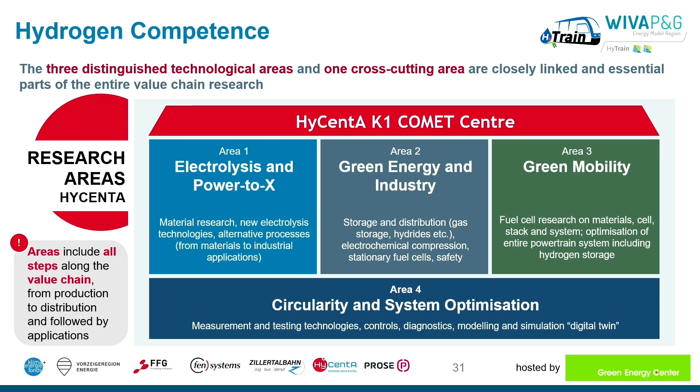So, as I mentioned, my presentation is about a comparison of different propulsion systems in the railway. This was especially necessary because the former decision on the hydrogen trains faced major headwind again last year. So we carried out a huge comparison of different technologies.

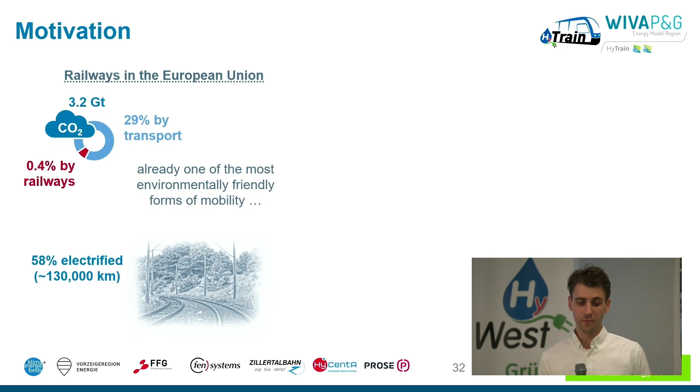And compared these. So why we need to decarbonize is all clear to us, so I don't spend much time on that. Even when the rail sector takes only a small percentage of the carbon emissions, only 58% of the European rail network is electrified. And in light of becoming climate neutral by 2050, these emissions need to be cut down to zero.

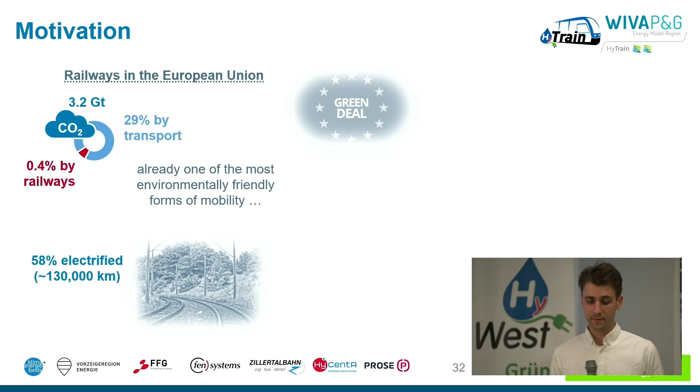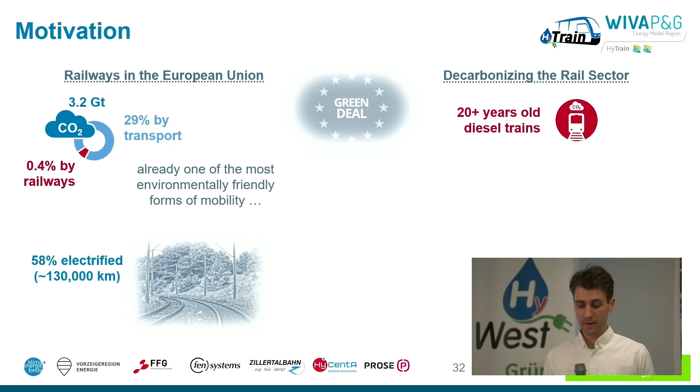So the challenge, especially for regional railway, is that electrification via catenary lines is cost intensive and resource intensive, so it's not always the case to use. This is especially the case for regional railways, because sometimes the driving frequencies or the passenger volumes aren't right for using a classic electric train. So here we are. We have some other technologies like the battery train or the hydrogen train, which are suitable alternatives.

But we need a case-by-case decision on which propulsion systems need to be used, because it always depends on the boundary conditions, which is the best or the optimum technology.

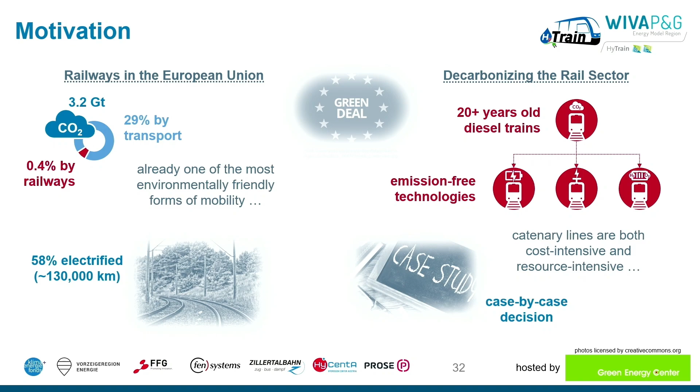So our goal was to build a methodological toolchain for scientific, technology neutral and holistic comparison of drivetrains, and the methodology is based on the following.

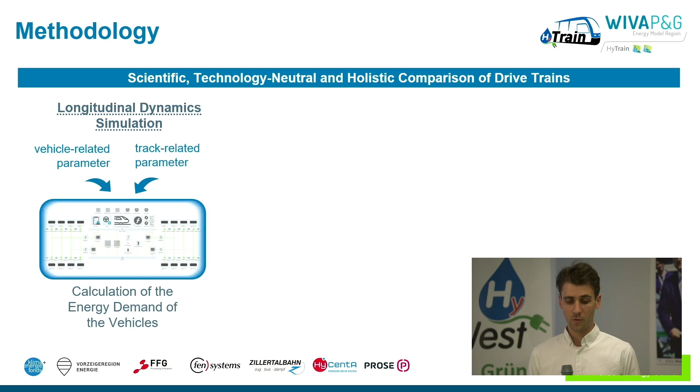First, we performed a longitudinal dynamic simulation for all the different propulsion systems to calculate the energy demand based on certain vehicle-related parameters and certain track-related parameters. Second, we collected a large amount of profound data from literature, manufacturers, and experts to quantify, for example, resources, costs, emissions, etc.

And for the typical operating period of 30 years for trains, we considered the single life cycle phases of both the vehicles and the infrastructure that is needed to supply the trains with the energy required.

And the last one is the multiple criteria decision analysis, which is needed to compare these technologies based on the quantifications from step 2 with regard to several aspects. In this case, it was an ecological aspect, an economic aspect, and also technical and operational aspect.

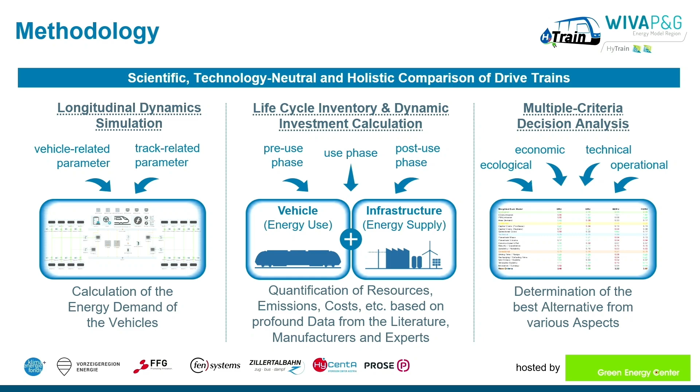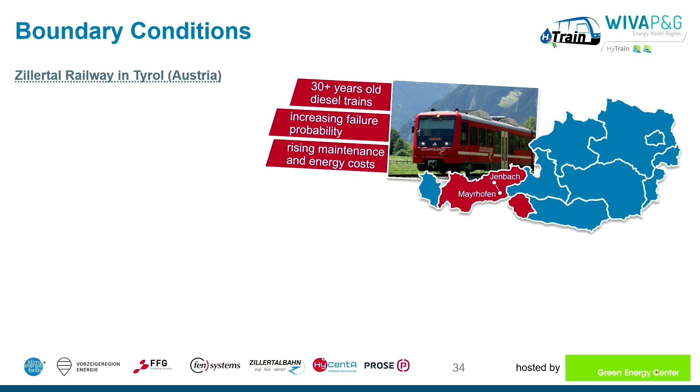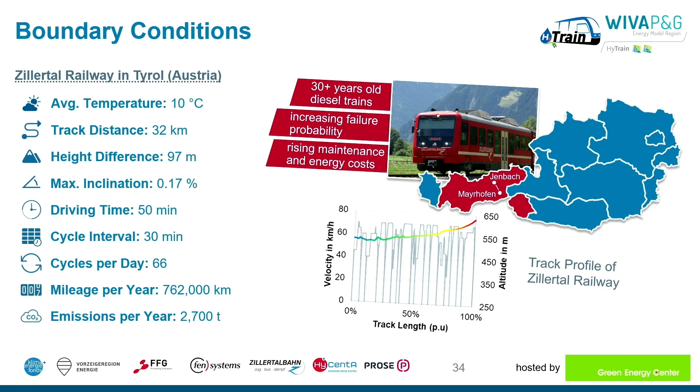So, as we all know, and I said it before, it's dependent on the boundary conditions. So we need further information about, here in this example, the Zillertalbahn. And I summarized all the track and vehicle parameters on this slide we used for our analysis.

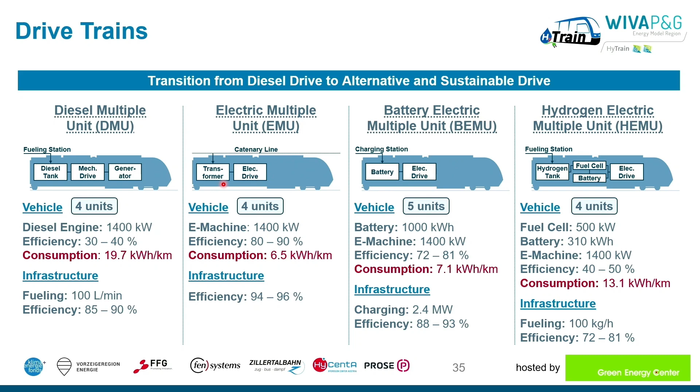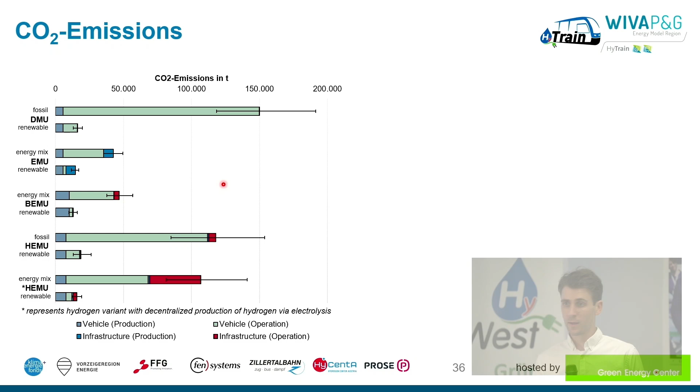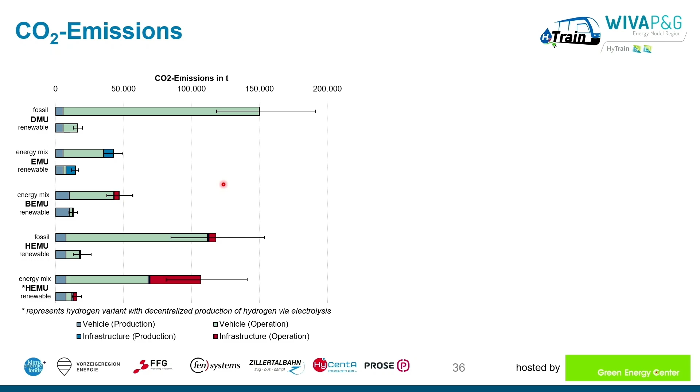With all this data we collected, we can show some results, for example on CO2 emissions. As you can see, we examined not only different technologies but also different energy sources, such as fossil diesel and renewable diesel or e-fuel, electricity from the energy mix and from renewables, and hydrogen, where we considered fossil and renewable hydrogen produced centrally and distributed to the application. On top of that, we included hydrogen produced in a decentralized way via electrolysis, also considering the energy mix or renewables as the energy source.

You can see the results here. The basic result is the bar, and both ends of the whisker indicate the upper and lower limits we found in literature describing the technologies. The results include direct as well as indirect emissions from resource use and energy use over the complete lifetime. What can we observe? The operation is the main source of emissions when we use fossil fuels or the energy mix, but when we use renewables, the production should not be ignored in terms of emissions. So as a takeaway, in the medium to long term only the use of renewables is suitable and sensible for rail operation.

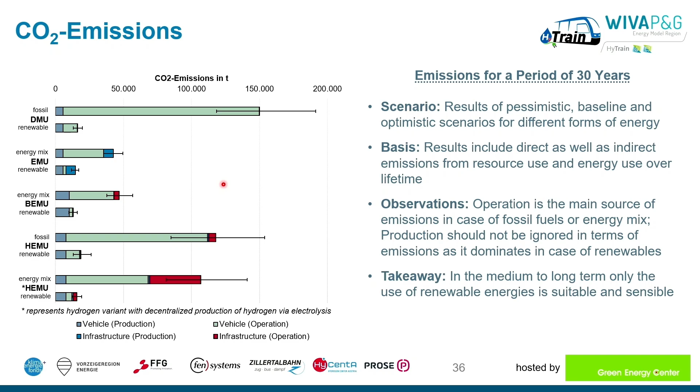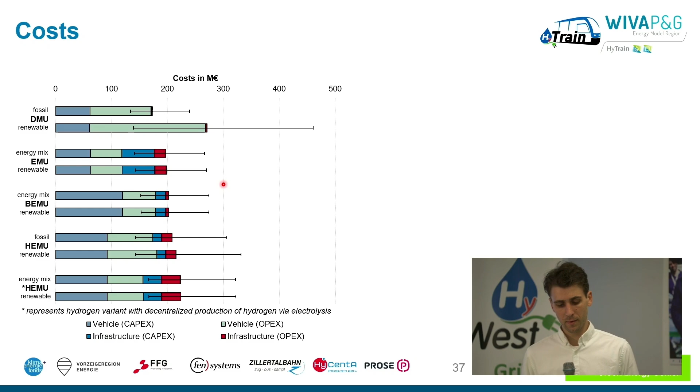A similar illustration is given here with regard to costs, but I will skip that partly because I will focus on the final comparison, which I will show you on the next slide.

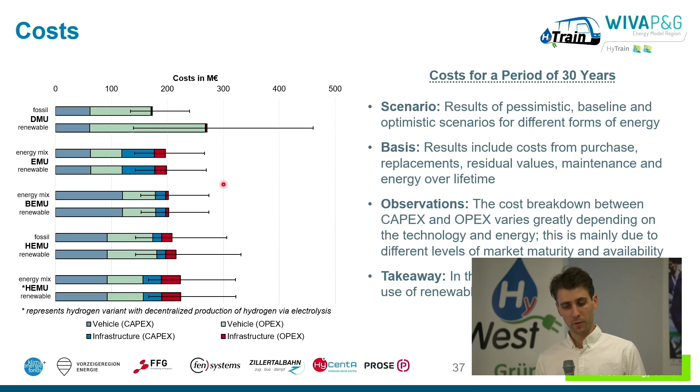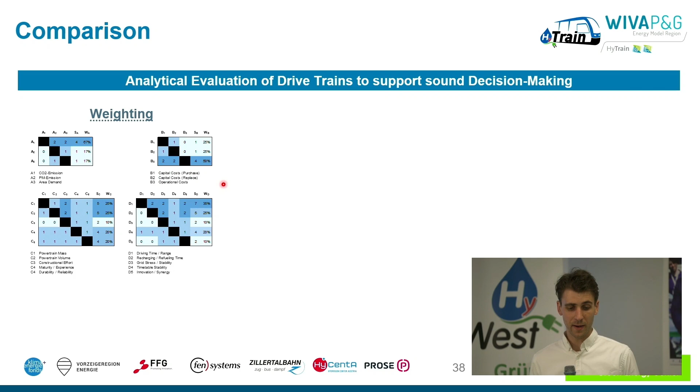We want to analytically evaluate the drivetrains with a multiple criteria analysis, and for this we used a priority matrix to give a weighting of the different aspects used in our comparison. For example, for the ecological aspect, we focused not only on CO2 emissions but also on particulate emissions or the area demand. For the economic aspect, it's the operational costs and capital costs. For the technical aspect, it is, for example, the powertrain mass, powertrain volume, constructional effort, technological maturity, and durability of the components.

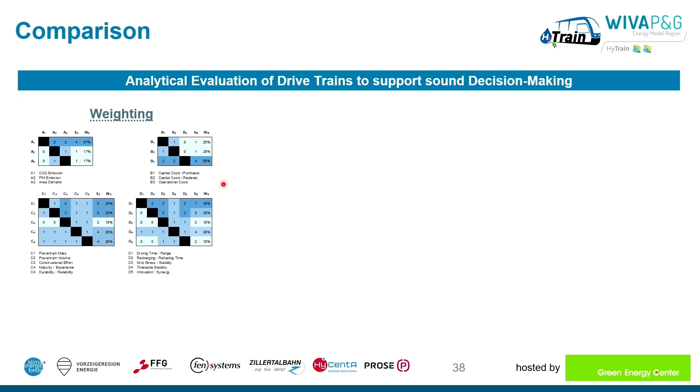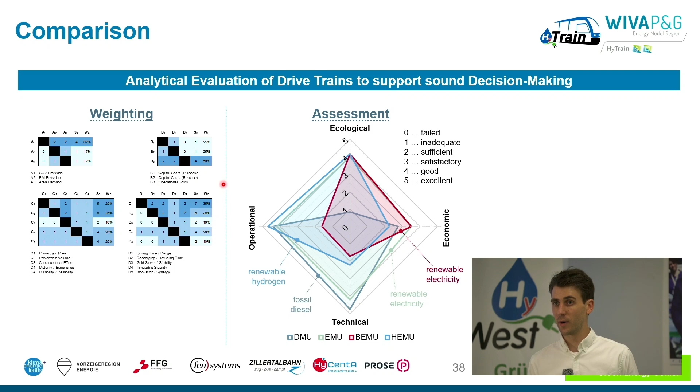Last but not least, for the operational aspect we considered, for example, the maximum driving range the technology is able to achieve, and the recharging and refueling time. By this we got a diagram that shows the four aspects in each corner. Here we focused on diesel from fossil diesel, the electric and battery train using renewable electricity, and the hydrogen train using renewable hydrogen produced via electrolysis on site.

As you can see, the hydrogen train has its benefits, especially in the ecological and in the operational aspect, but has its disadvantages in the economic aspect, for example.

Now for a really final comparison, we need to compare the ecological, economic, technical, and operational aspects. So we use another priority matrix to do so, and this is one example of the result we can get. You can see here the electric train is the best in this case, followed by the hydrogen train, and followed by the battery electric train.

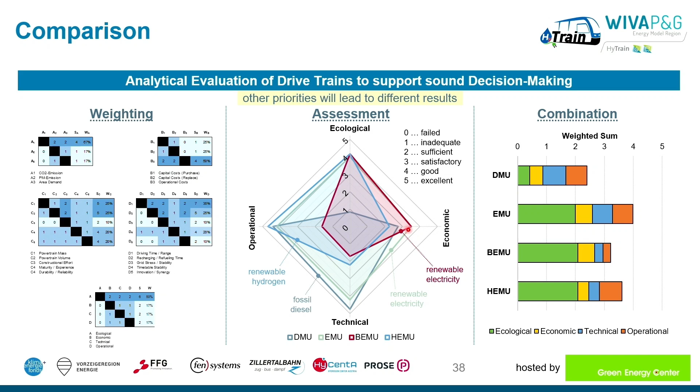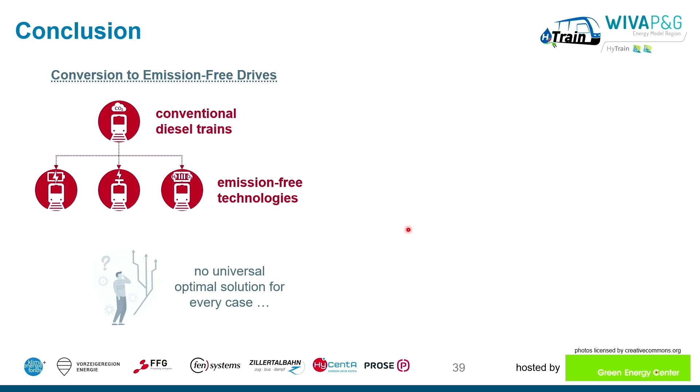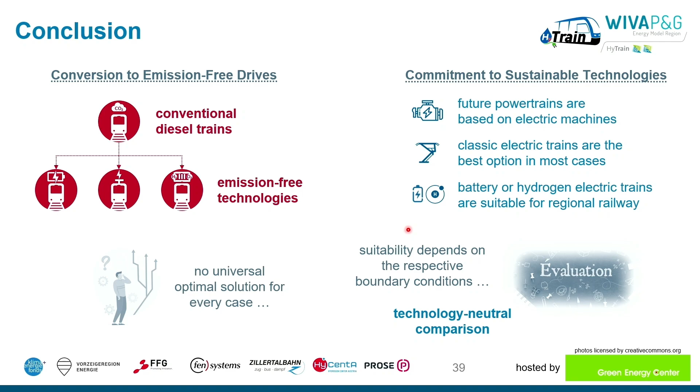To conclude my presentation, I'd like to highlight once more that there is no universal optimal solution for every case. But some important general findings from the analysis are: future powertrains should be based on electric machines. Classic electric trains are the best option in most cases, but battery or hydrogen electric trains are suitable, especially for regional railway, if the boundary conditions are fitting. The suitability of each technology depends on the respective boundary conditions, which is why the proposed comparison should always be applied for each rail project. Thank you very much.